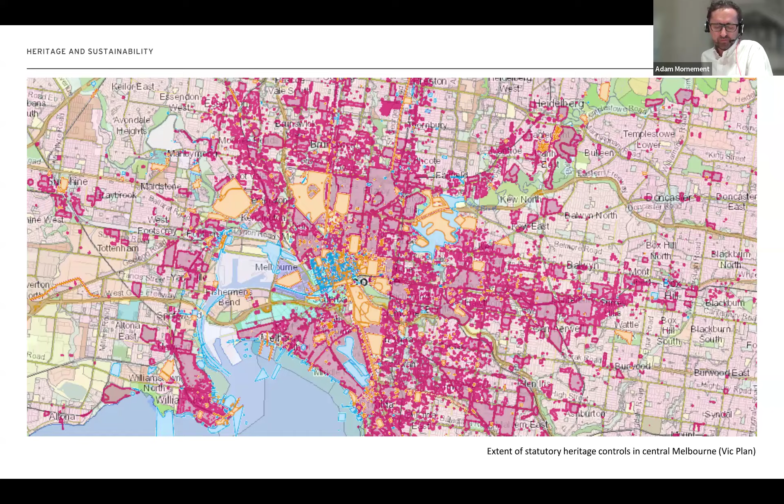If you could go to the next slide. I also think it's worth remembering where heritage came from. It was born of protest in the 60s and early 70s; concern about the extent of change to historic urban environments and the perceived mismanagement of natural environments were societal priorities. I mean, these were the issues that got people out on the streets.

And today there are other priorities which variously invoke aspects of sustainability, including affordable housing, aspirations for greater urban density, reconciliation, and responding to a changing climate. And it's arguable, just by way of framing, that heritage as presently framed is poorly aligned with some of these priorities.

I think that we've all seen headlines telling us that heritage is a barrier to greater urban density, that there's too much heritage, that heritage is a problem, and we've all seen those headlines; heritage is an easy target. It's easily misunderstood. It's easily misrepresented. At Lovell Chen, we do try to take a longer view, and we see heritage or existing buildings as an opportunity. If you could go to the next slide.

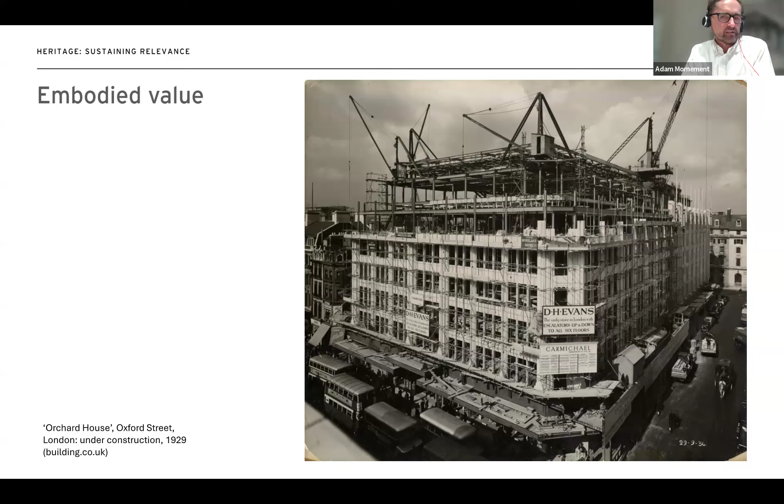Unfortunately, there is a coda here. The planning inquiry's decision itself was overturned by the High Court, so Marks and Spencer's got their wish. But there was a strong sense that a line is being drawn, and I think that what we see overseas, and Britain's far from an exception, it can reasonably be anticipated to come to Australia in the not too distant future. So if you go to the next slide, I think you could probably flick over that one.

Thank you. Tina, I might hand to you at this point. Thanks, Adam. And just with this next part of the presentation, we'll probably talk more to the architect's perspective, and we'll show some case studies of how we have applied what Adam has talked about. I think the main thing is that for us as a practice, when we work with existing buildings, we do see it very much as an opportunity and not a constraint. And we do find that working with existing buildings really grounds our work and always makes it richer.

The first case study I wanted to talk to is the Point Nepean quarantine station. And this is really about, in reusing an existing building, the first step of making it feasible and the first act of creativity, I guess, is really about finding a compatible brief for the building, one that fits comfortably and can be incorporated without causing undue harm.

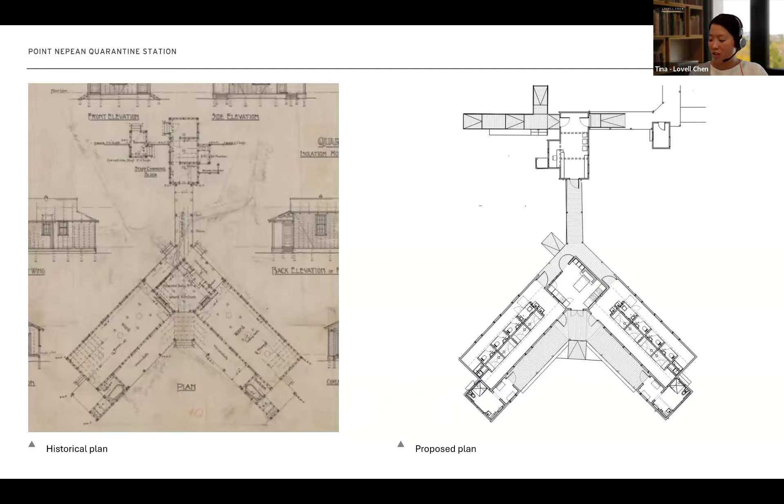The next one, the old quad at the University of Melbourne. This is the first state-listed building where the principles of the Passive House EnerPHit were applied. And it was a project which challenged what we could expect of existing buildings, which are cold and drafty and uncomfortable. It really showed that you can expect these buildings to be comfortable and to perform well thermally and be comfortable and healthy environments for people to use.

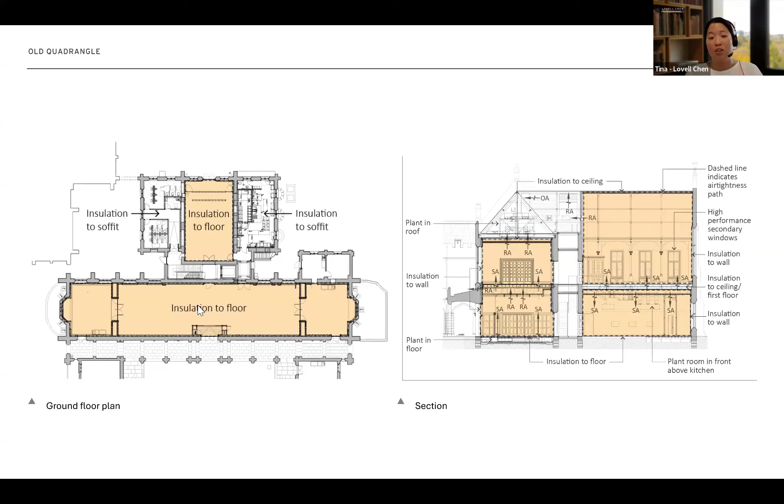As part of this with the mechanical system, we introduced fresh air, and because of the high performance of the envelope, we were able to reduce the mechanical cooling and heating demand to about 10% of what it normally would be. And the economic gain of that was that we were able to reduce the amount of plant that we had to install. And we were also able to deliver this project without having to trigger major plant upgrades to this building. And it was also a really positive heritage outcome because we can conceal all of the plant inside the roof space and not have it on the roof.

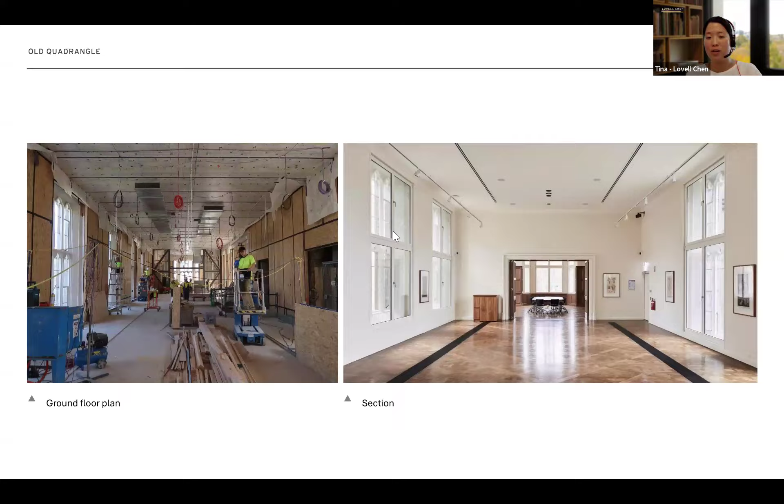These are some photos of the installation occurring. So the structural insulated panels, airtightness membrane, and then the photo to the right shows our new secondary windows on the inside. The approach was really tailored depending on the space. So in the library, where the interiors were more intact and we had existing trusses, we had to work around that and make sure that the architecture was still evident.

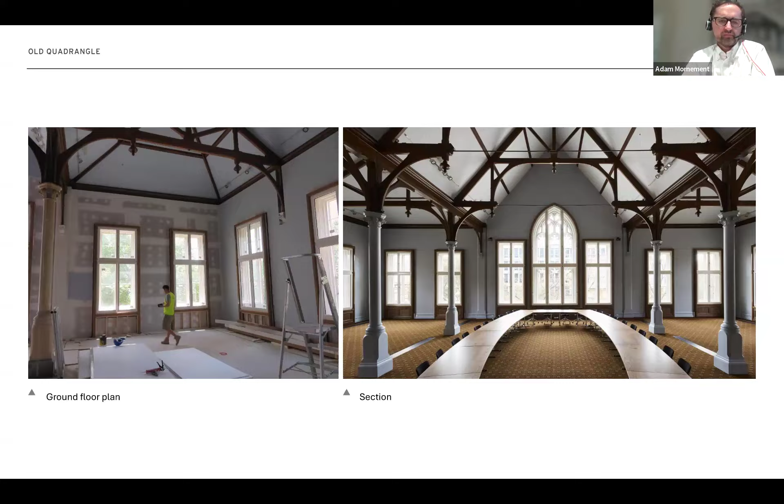Adam, do you want to add to this? Thank you, Tina. Yeah, I would just add that the regulator in this case was Heritage Victoria. The old quad is included in the Victorian Heritage Register, so we did need to make application to Heritage Victoria. And I think fair to say they were challenged initially by the ambition to apply this EnerPHit outcome to the building. As Tina said, it hadn't been done before to a heritage asset in Victoria, possibly Australia. I'm not sure about that, but certainly Victoria.

And in entering into discussions, as Tina said, this is a structure, a complex that's highly evolved. There are varying levels of intactness, integrity, but a critical consideration in discussions with Heritage Victoria was one that drew attention to and sought an acknowledgement of the fact that this was the primary seat. This was the origin of the university, the original university, the first university in Victoria, in Melbourne. It is a place symbolically loaded with aspirations for innovation, for learning, for ambition.

And in that regard, it's an association that we referenced in making application to Heritage Victoria. And not in isolation, that was certainly not the only consideration, but it was symbolically resonant in that way and felt comfortable and appropriate as part of a recognition of an outcome that could provide new life for this asset, we hope, for the next 100 and more years, but one that built on the principles embedded within it.

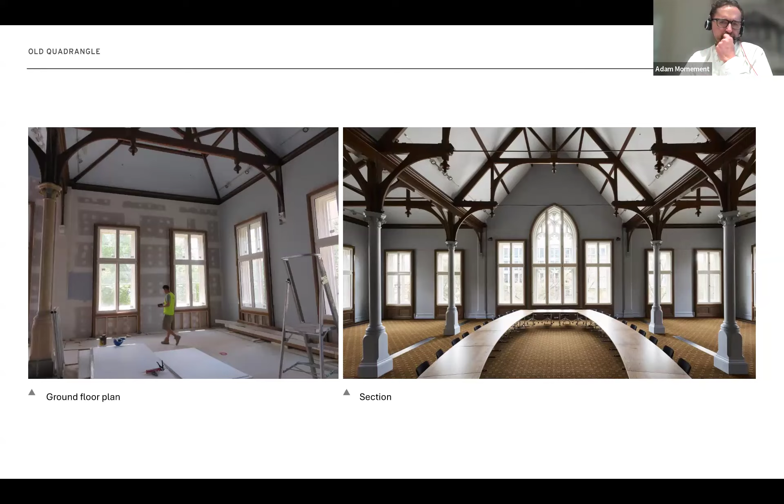Thanks, Adam. And this fabric first approach is one that we practice to various levels depending on the project. And we do apply it also to different scales of building. So in the local heritage overlay, buildings such as this, which have no internal controls, provide a really good opportunity for installing the second skin, upgrading the windows to achieve a thermally efficient building.

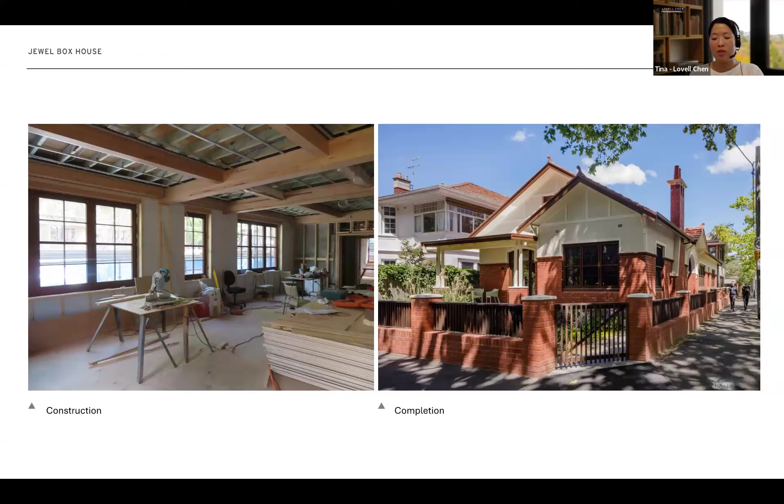And then at the other end of the scale at University College, we've built two entirely new wings, which were also built to the passive house principles. And it resulted in an increase of GFA. So the attic space, which would have otherwise been taken up by plant, was then able to accommodate a whole new level of student residences. We were able to avoid the upgrade of the substation, also due to the reduction of the mechanical heating and cooling.

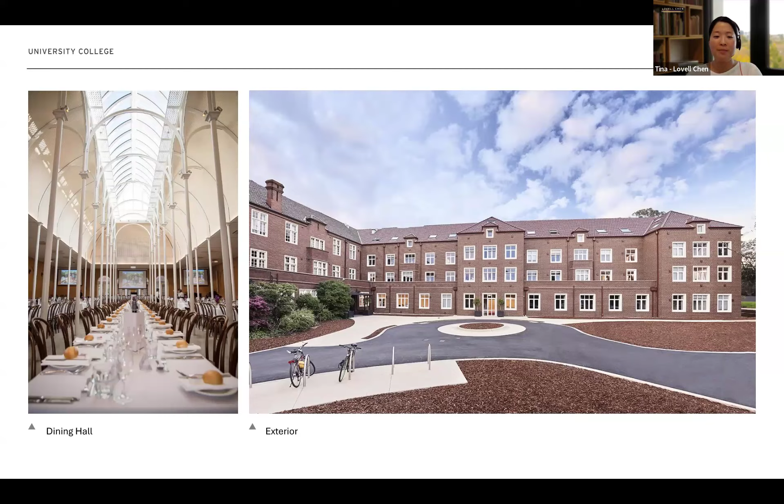The next project is the Wade Institute of Entrepreneurship. So this is at Ormond College in Parkville. This project was really us exploring an approach of coexistence of new and existing buildings, and one that's about the new building not being compromised or having to mimic existing buildings or being hidden.

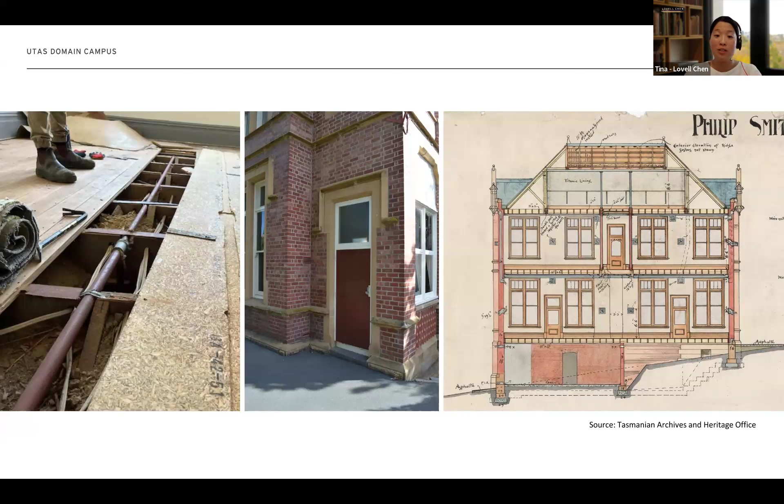We also did use the tools that were available at hand so that we had evidence to support what we were doing. We did a comfort analysis here to work out what the temperatures would be like in the building after we'd done our building fabric upgrades. And what it told us was that in actual fact, most of the levels of the building don't need heating and cooling. They only need heating, and only the attic required cooling.

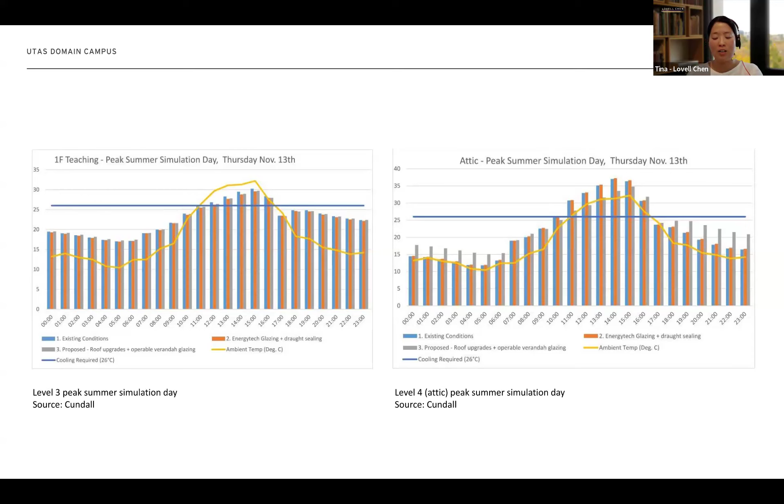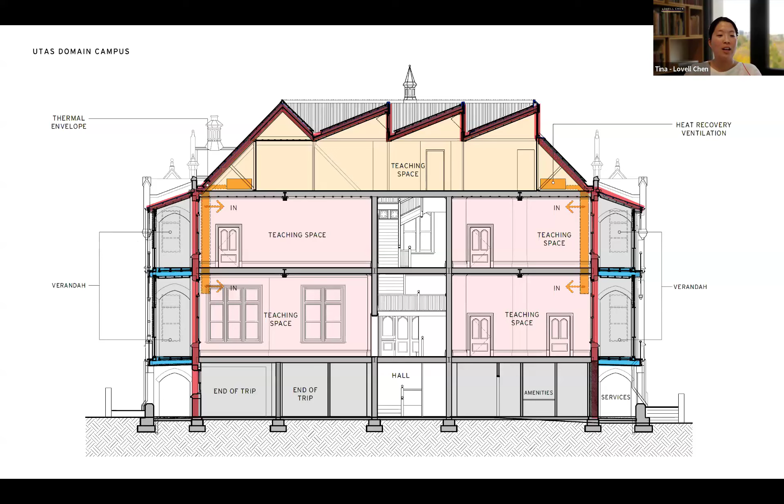So this was really important in a building where there were no false ceilings or no bulkheads where we could conceal any mechanical services. And it allowed us to be really controlled where we introduced plant. And then the other thing that we introduced were infilling these verandas, so that verandas which were previously too cold and too windy to use were now enclosed with these guillotine windows, which the occupants could open and close, and basically maximizing the spaces that we could use in the building.

I think it's, Tina, a really good example of that term heritage thinking that we referenced earlier, where taking the time to truly understand the building in terms of its construction technologies, its inherent embodied values, as well as the heritage significance that attaches to the building through its inclusion in the Tasmanian register, that total understanding of the embodied characteristics and qualities of the building, as well as the values that attach to it, being historical, cultural, associational, whatever they may be, it enabled you, as you say, to do as little as possible in seeking to reactivate the building and breathe new life into it.

So I think it's a really good example of that concept of how heritage thinking can be really productive as a process, and we're not resisting an existing condition, we're actually embracing it and knowing as much as we can about it before starting work.

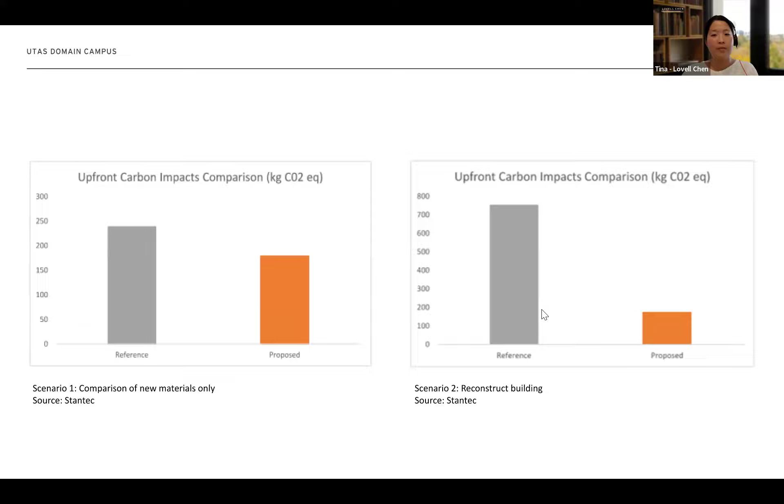The theme of repair was also very strong here in this Philip Smith Centre and also throughout the site. There is a lot of stonework to the facades, which was well overdue for its next round of maintenance. And so we took an approach of looking at each block on a case-by-case basis. We scoped it in a way so that we could keep as much fabric intact as possible. But we're also aware that the next round of maintenance works probably wouldn't occur for another 25 years or more. And so we needed to allow for that lifespan in any work that we did.

And then across the rest of the site, the UTAS campus, the Domain campus, is where UTAS was founded. So we have, in the process of doing the master plan and the landscape design, looked at reconciling the history of UTAS's founding home with what this place was for the Muwinina people and Palawa people. And it's really a next step to the apology stone that the Vice-Chancellor has installed there.

The last project we'll talk to is Tower Hill. It's probably best known for the Robin Boyd designed visitor centre, which has the roof that evokes the cones of the volcanoes. We were commissioned to do the refurbishment of this building, and in the process found ourselves looking at the amenities block too and advocating for its retention. I think this project was about not necessarily accepting that if a building is not listed that it can be removed, and really questioning whether it should be removed before we take that default approach.

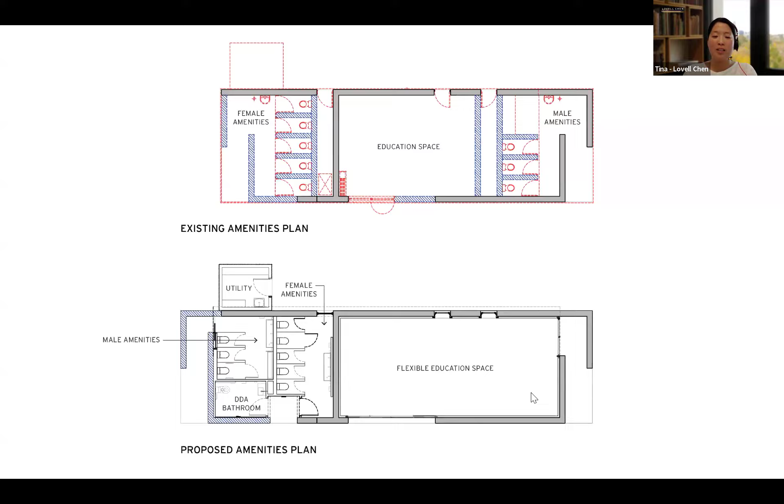So the building here, what we looked at doing was we compressed the planning of the toilets so that we could provide the compliant facilities and then provide this flexible education space so that EMAC could continue to use the building.

And so while this building isn't listed and the visitor centre is listed, I think it has been an important process in retaining this building because of its merits from an environmental perspective, its connection with the visitor centre, and also all of the social history associated with that. So it's been quite a positive outcome.

Adam, did you want to add any closing thoughts? Look, just to add, Tina, that I agree very much. It's been an incredibly positive outcome. And just reflecting on the amenities block that, as you say, was initially contemplated for replacement, and through negotiation with the client, there was an ability to persuade them of the merits of taking a different approach and working with an existing condition to deliver a positive outcome.

There's sort of an advocacy dimension to that work, and we were lucky to have a great client to work with, someone who was open to ideas and really happy to embrace a different way of thinking. So I think it's a really good example to give and rich in terms of the issues that confront us all in navigating where we are from a perspective of heritage as attached to country, as attached to European traditions, and as attached to ambitions for improvements associated with embodied carbon and embodied value. So I think it's a really good example of many of the issues that we've touched on through this introductory session today.